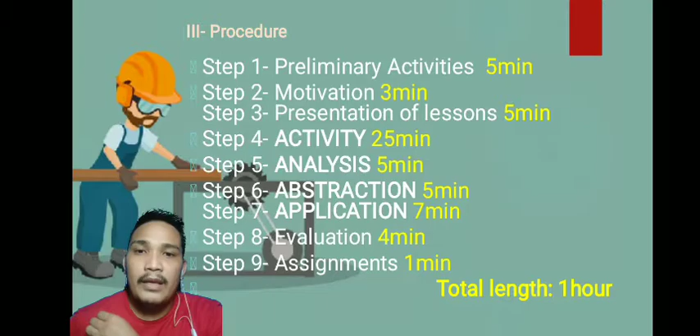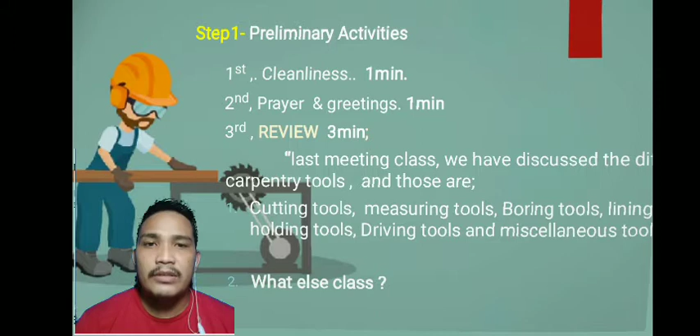So here are the preliminary activities. First is cleanliness. Second is prayer and greetings. Third is review, where the teacher will ask the students about their previous lessons.

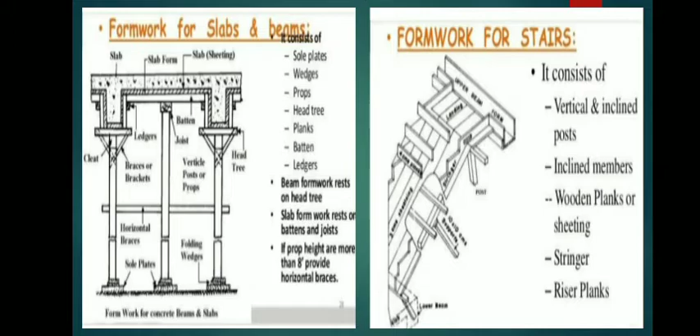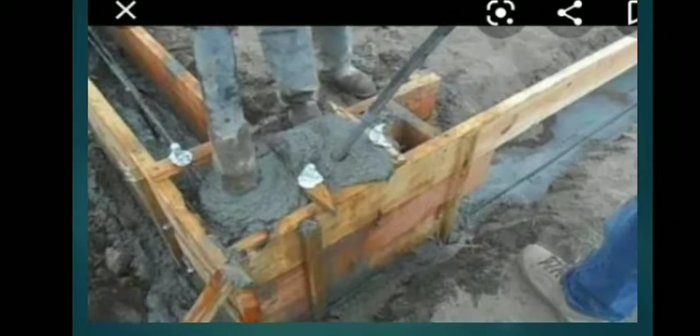Collaboration is more than just working together with others. To really work together effectively, especially when resources are tight, we need to invest in good collaboration. Good collaboration means sharing the responsibilities, risks, benefits, and the credit, and means that everyone involved works toward a common goal.

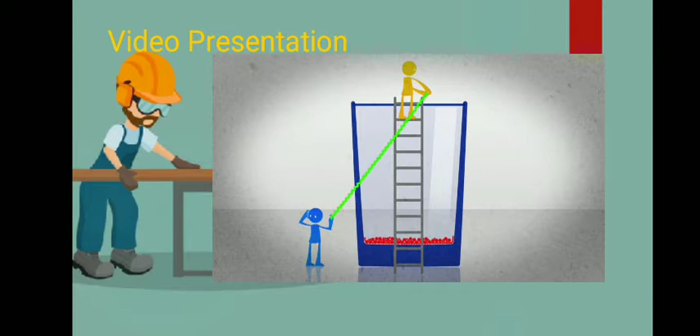To do that, we need to know our limitations, leave our ego at the door, keep an open mind, be physically and mentally present, ensure everyone has an equal voice, invest trust to get trust, step out of our comfort zone, and value each other's contributions.

For the presentation of our lesson, I simply ask the students about their observations and thoughts from the video or film viewing they have watched. So I just ask, okay class, what do you think is our topic for today based on what you have observed from our film viewing?

Now, for our activity, I first divide the section into three groups. We have group A, group B, and group C.

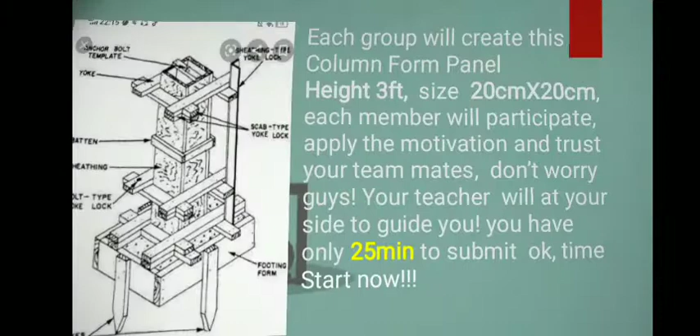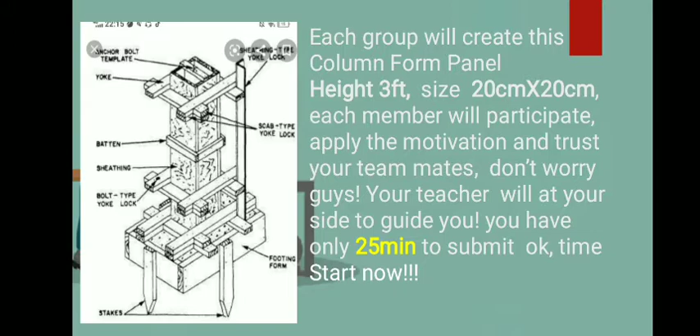Analysis. In our analysis, the teacher will ask the students about the different forms and panels and about their activity. Teacher asks: class, from the slides that we showed you, what are the different types of form panels? And from your activity, what is the purpose of collaboration? Then, are there any advantages or disadvantages in collaboration?

Then the student will answer. So, abstraction. In our abstraction, we will ask the students to get one half sheet of paper, write their name and the date, and answer the following questions: 1. Write the different types of form and panels. 2. Write the advantages of collaboration. 3. Write the disadvantages of collaboration.

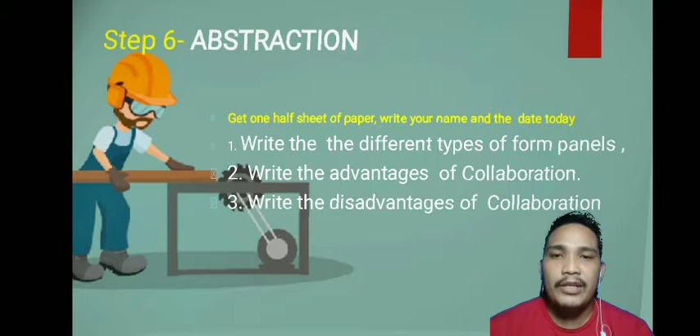Now, for our application, I simply ask the students to write at least 5 activities or works that need collaboration. I also ask them to explain why those works need collaboration. So those are for our application.

For our evaluation, I use identification for test 1 and short essay for test 2. For the identification, I ask them to draw the following form panels.

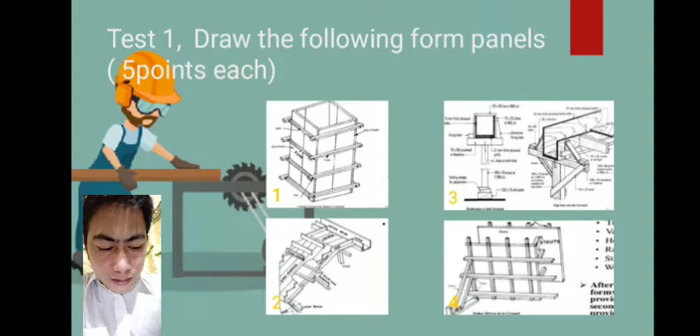And for test 2, the short essay, I ask them to describe what collaboration is all about in 3 sentences. So describe collaboration in 3 sentences for the short essay, and that is 10 points.

And for identification, there are 5 points each. So those are for our evaluation. I'm sorry, test 1 is not identification, this is an illustration because the instruction is to draw.

So the students are going to figure out those items. So 5 points each for the illustration, and 10 points for the short essay. So that's all for our evaluation.